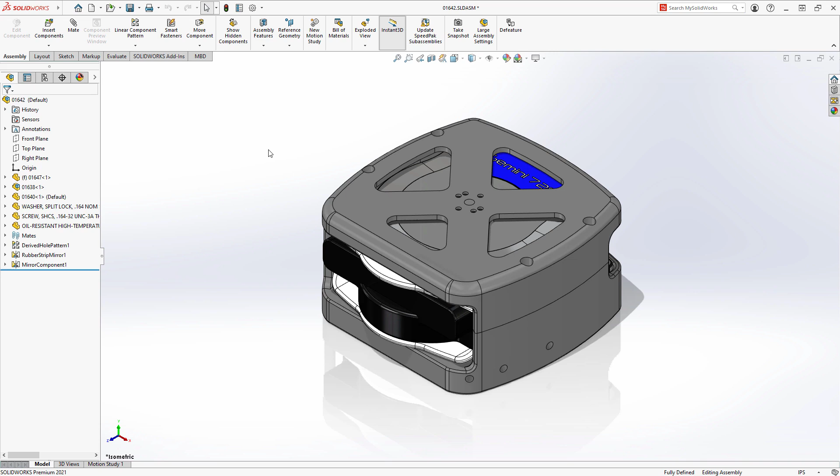SolidWorks Plastics 2021 gives you insights into new injection molding processes for your designs, as well as continuing to simplify and streamline the setup process. A new injection molding process is available in Plastics 2021 to accommodate multiple material overmolding. This manufacturing process is perfect for parts like this that require a soft protective covering molded over the rigid plastic.

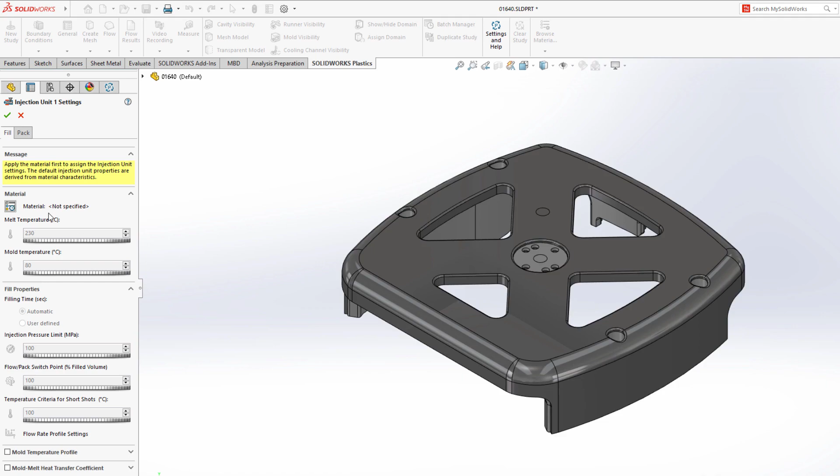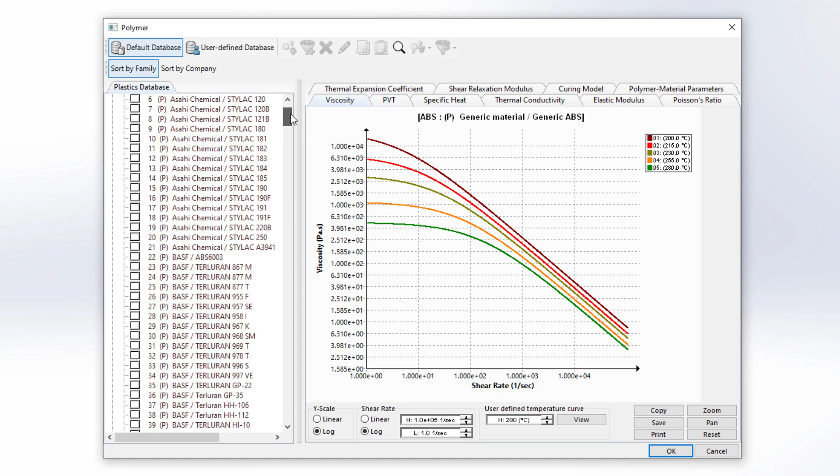You can now also fully define your analysis before any meshing is required. This starts with selecting materials for each injection process. SolidWorks Plastics 2021 has added over 300 new materials from global manufacturers. For the first injection, one of the new ABS materials from BASF will be used for the main body.

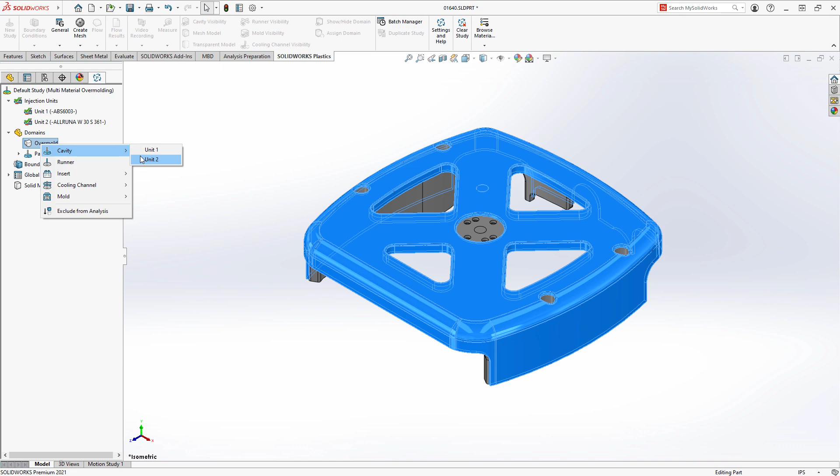The second injection process will use another new material, a thermoplastic, for the soft protective cover selected from the recently used list. Once the material for each injection process has been specified, you simply need to apply the material to its associated domain, in this case the ABS to the part body and the TPE to the overmold geometry.

SolidWorks Plastics makes it easy to define other critical elements in your plastics analysis as well. For instance, you can define cooling channels without the need to physically model the mold. SolidWorks Plastics 2021 significantly improves your simulation results by creating more realistic baffles and bubblers within these virtual cooling channels.

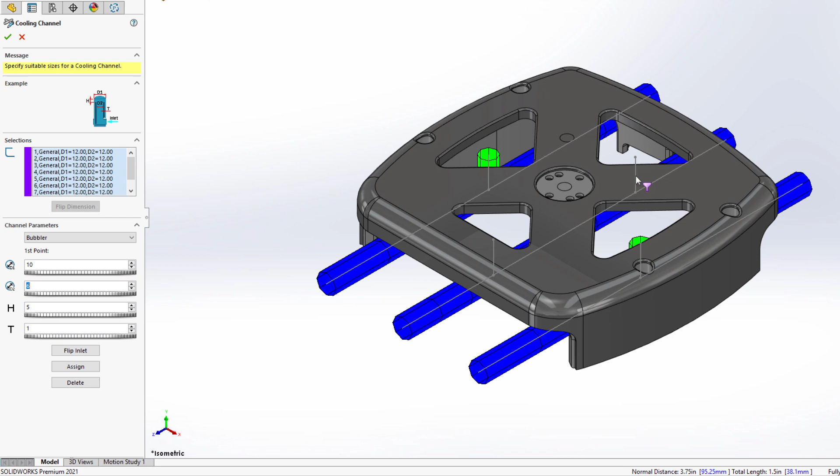All you need to worry about are the specifications for each type, which include parameters like the OD, height, and the thickness of the blade in the baffle channel and ID tube in the bubbler channel. You will see how these new changes impact the mesh shortly.

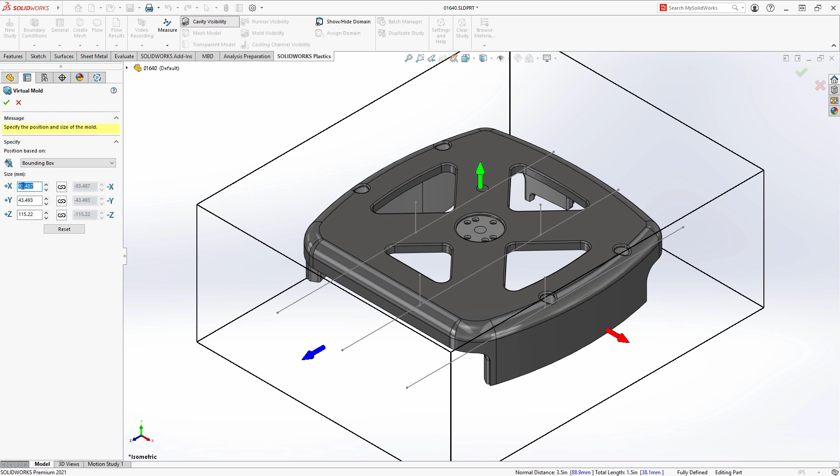Like the cooling channels, you can define a runner system and a virtual mold, allowing you to analyze and look at multiple scenarios for your injection process before investing time and energy into designing and modeling the complex components of the mold itself. All of these domains, like the part geometry, can now have their materials applied to them prior to any meshing taking place, allowing you to fully specify the components in your plastic injection analysis.

Other critical mold design elements, such as the injection locations, can also be defined directly on the 3D model without the need for meshing any geometry. By referencing the geometry itself instead of the mesh, it saves time setting up different design scenarios, as well as automatically updating when the 3D model itself changes.

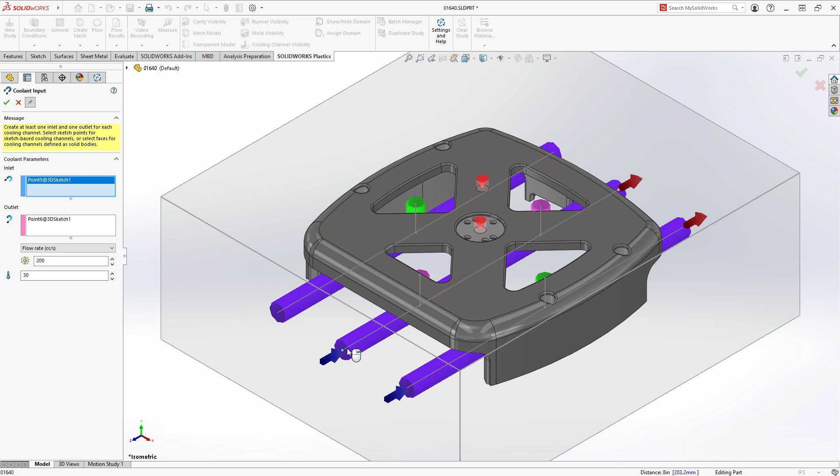All of these boundary conditions in the plastic study can be defined geometrically this way. This includes other design elements such as the cooling channel inputs and outputs, as well as things like the clamp force direction. The entire plastics analysis has been defined geometrically and virtually. This makes the file on disk smaller, portable, and more adaptive to changes.

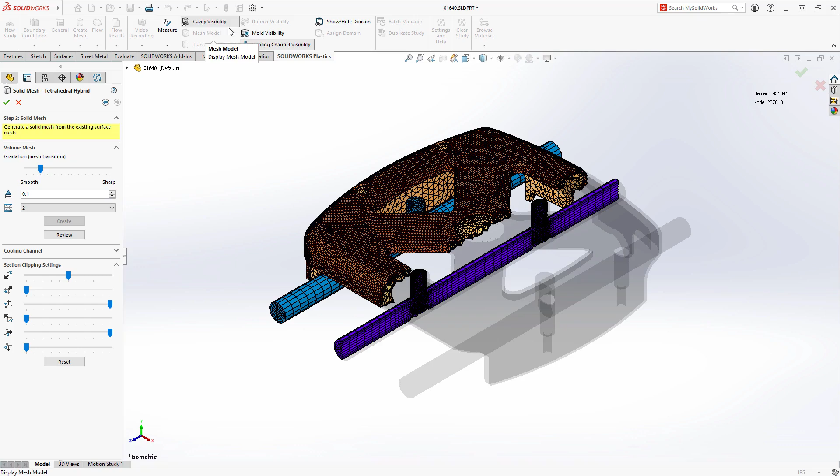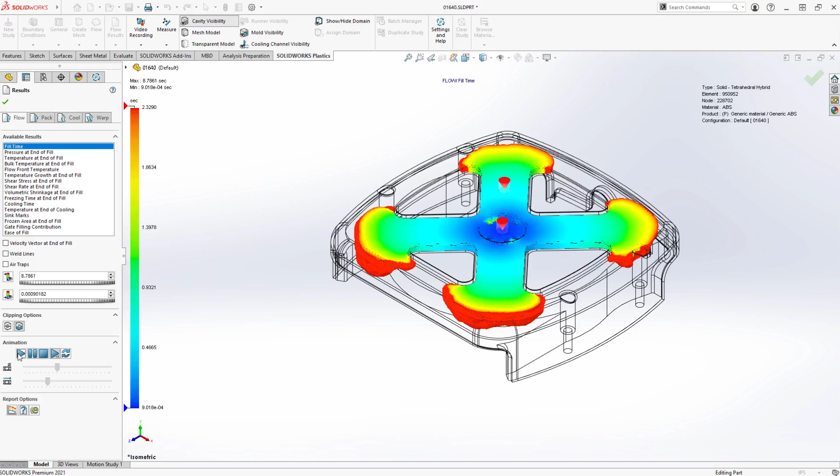Eventually, when you do mesh the model in preparation for the final simulation, you will immediately see the benefit of those improved baffles and bubblers defined earlier. They are now fully meshed and modeled appropriately, giving you more accurate simulation cooling results without the need to fully model the cooling channels and the physical components that make up those special inserts.

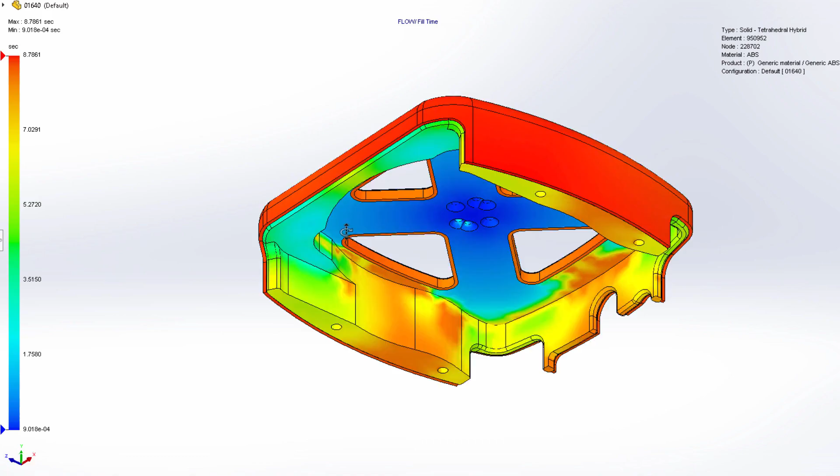By defining the entire simulation study on the 3D model in virtual domains, it has enabled a more dynamic workflow where you can look at and evaluate different scenarios in your design before any of the heavy lifting is done. The results themselves, which include the new multi-material overmold injection process, are now more accurate when considering cooling, giving you confidence in your injection molding process before you even start designing or investing time and money into the mold itself.